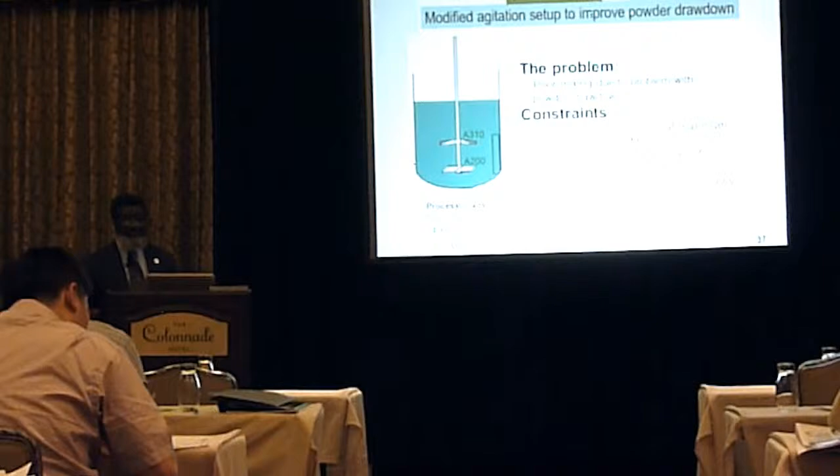So in closing, let me just talk about three cases, three applications. The first one here is a troubleshooting problem.

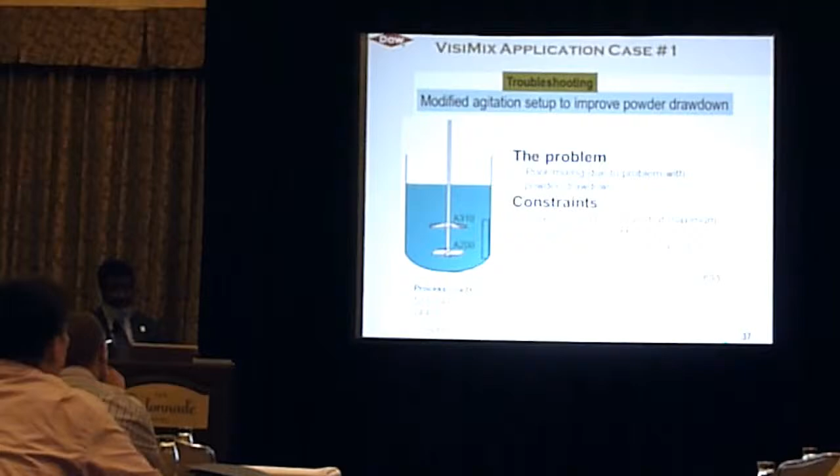The problem was poor mixing due to a problem with powder drawdown. You had a configuration in the plant, and they were having problems drawing down the powder. Part of it was the fact that the particles were very light, so they don't sink, but also part of it was the fact that it doesn't work very well. So you need to find a way to draw it down, and in this case you want to create a sort of little vortex in the center to draw it down.

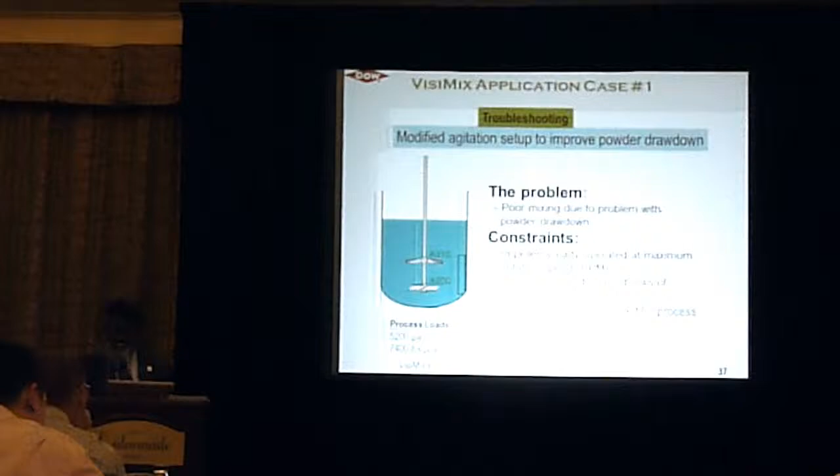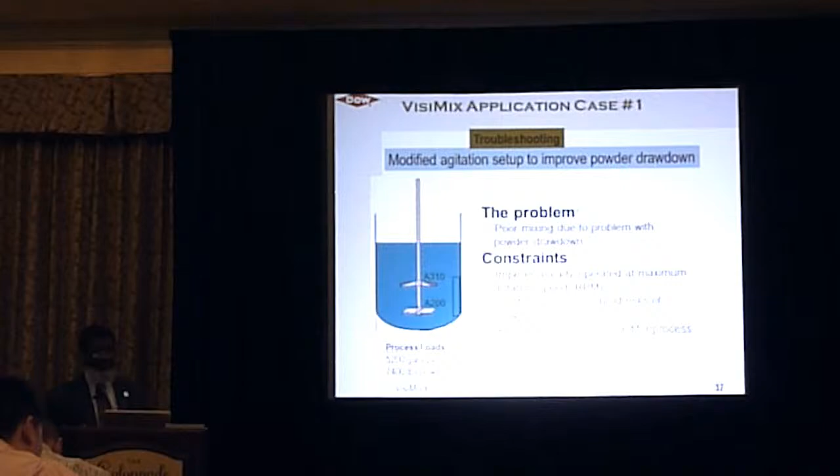We looked at this in a 5,000 gallon process. You're adding about 7,400 pounds of powder - not all at once, but adding over time. Some of the constraints were that the impellers already operate at maximum rotational speed for the shaft design, so you cannot increase the speed. So what are some other things you can look at?

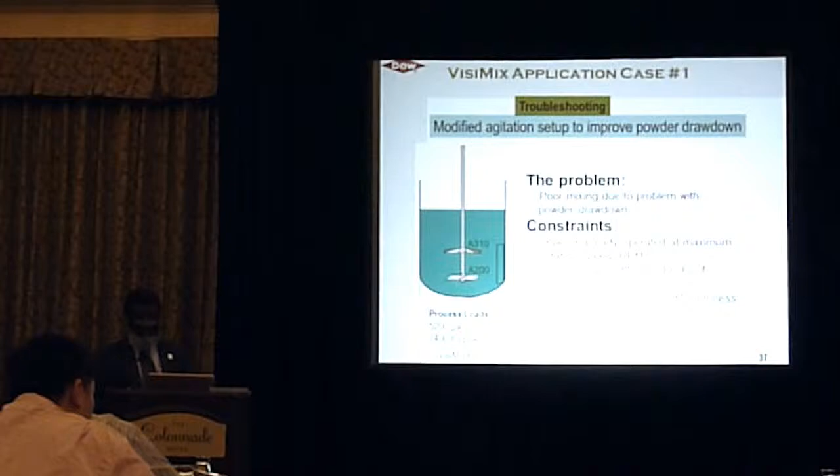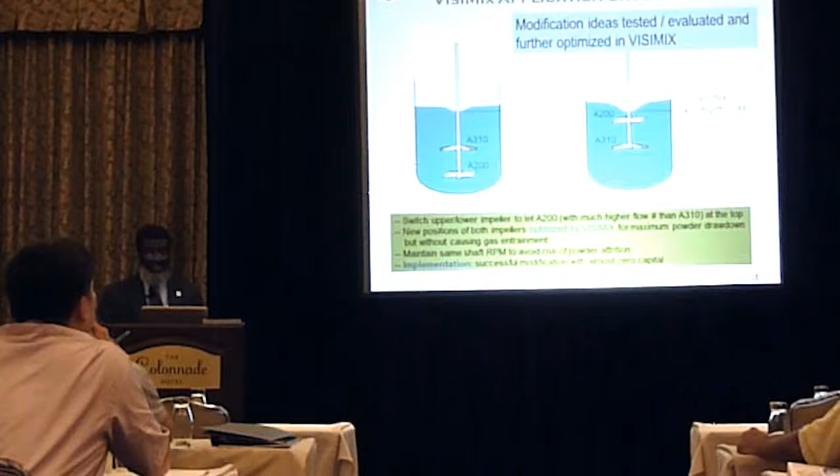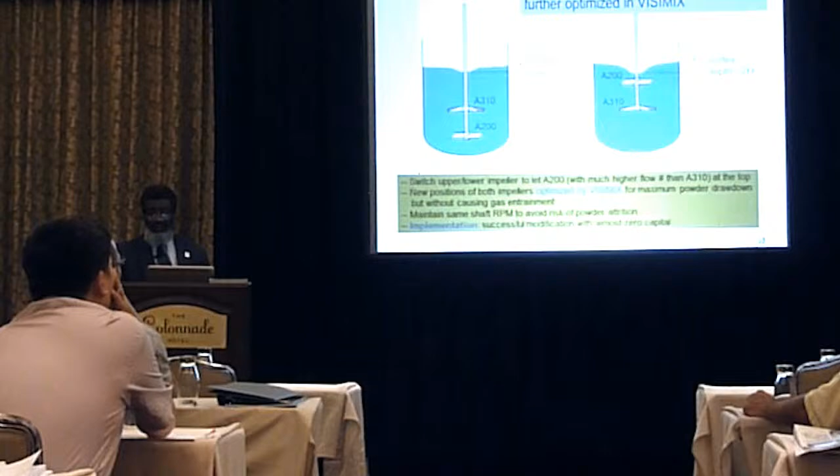Also, air entrainment is undesired for this process. Some of the things we looked at: on the left is the previous setup, where they had a pitch blade and a hydrofoil on top and the location of it. On the right, we looked at a number of cases - a colleague looked at a number of cases and decided on the case shown on the right there.

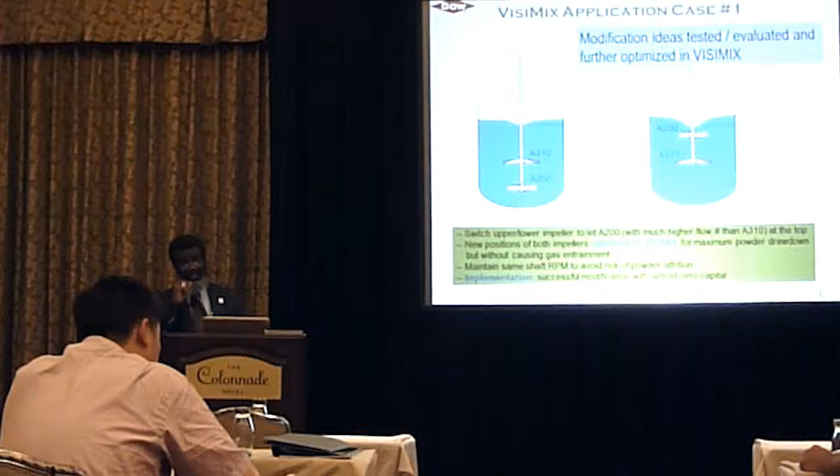This was implemented successfully in the plant. This doesn't take a whole lot of time to do because, as I said, because of the accessibility of the tool and so on, you can do these things very quickly. In this case, we were relying on creating a vortex, but a vortex in such a way that it doesn't suck in a lot of the headspace gases and create a lot of bubbles in it.

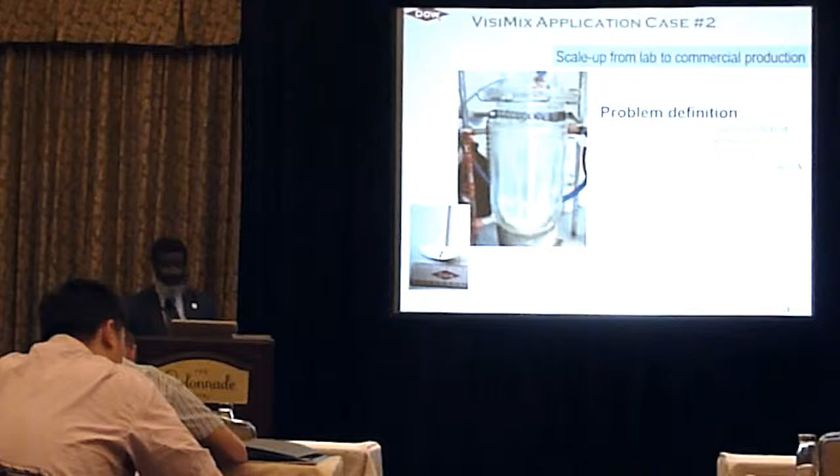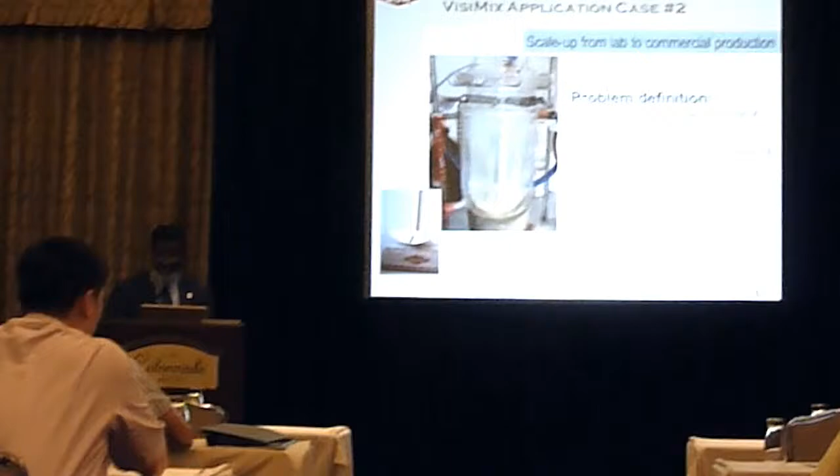And this was tested, and it worked very well for the plant. Here's a case where we're doing a scale up from a lab to commercial. We're going from 700 cc's to a scale up of about 10,000.

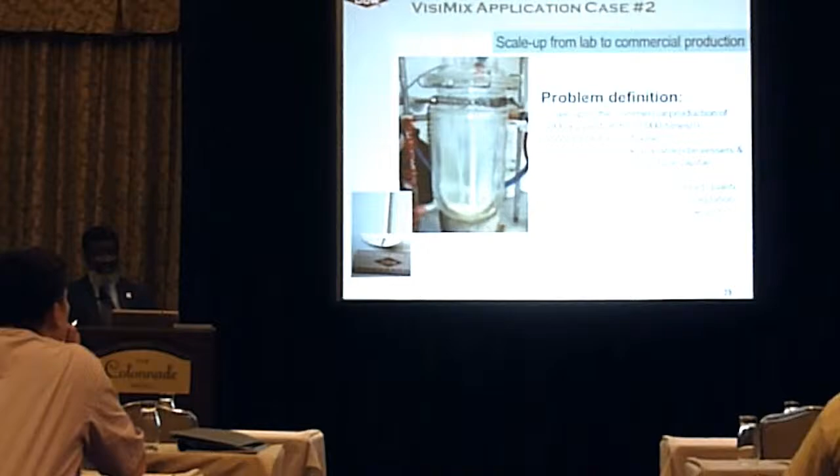Here's a case where the work basically was done - you did the lab work with the 700 cc's, and you want to be able to convince somebody in the plant that the proposal you're making, scaling up 10,000 times, is going to work.

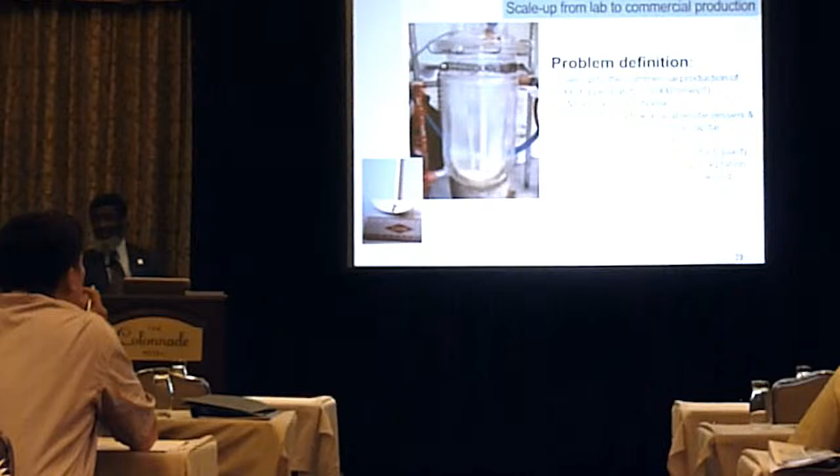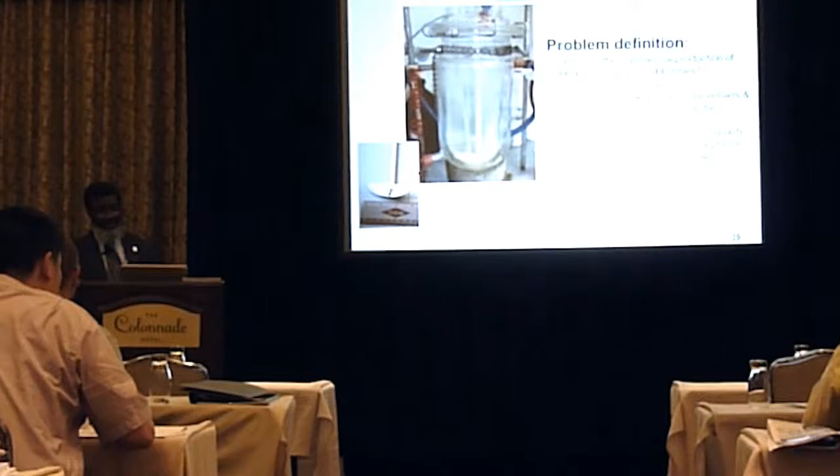So what reactor to choose? They had a number of available idle vessels that they had to look at in the agitation systems because they want to reduce capital. This kind of thing happens all the time in facilities and plants where you want to reuse equipment that you already have. So how do you scale up the agitation?

Lab tests show that the product quality was very sensitive to mixing or agitation. Too much or too little agitation will negatively affect the product. Now, we can't tell you what the product was and all the details, but at least we can share this part and what was the mixing time involved.

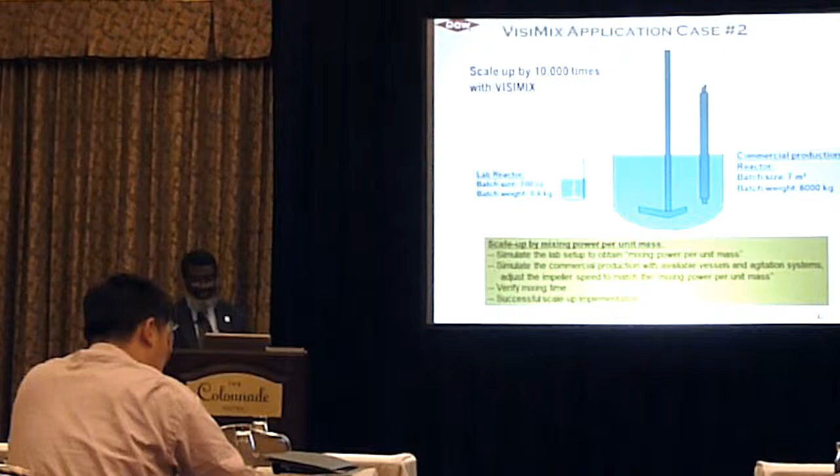So again, we used VisiMix, and this was the case that was selected. Again, this was successfully implemented. Because of the accessibility of this tool, you can do this kind of assessment relatively easily.

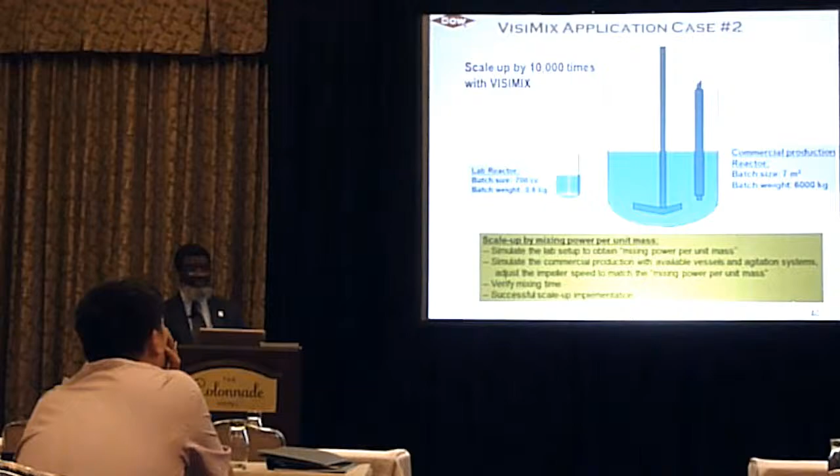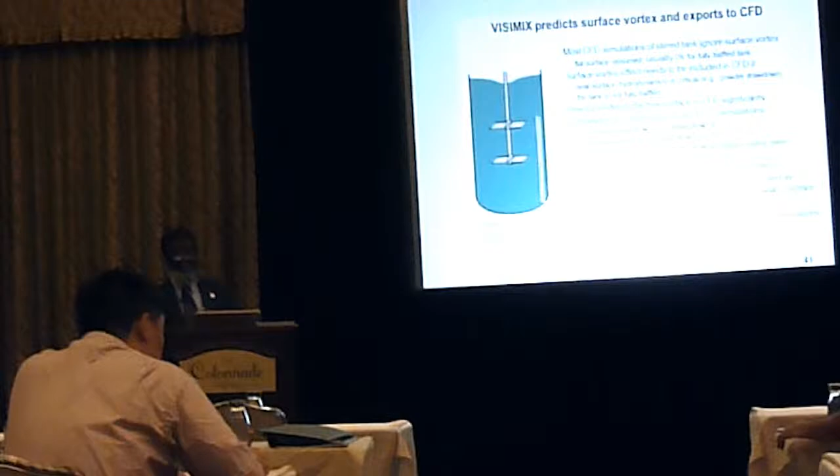Okay, case 3 was a case where we were doing some computational fluid dynamics. In most CFD calculations, you assume the liquid surface is flat, which we know is not true. The assumption is that the flat surface does not affect the hydrodynamics. But if you carry out processes where you need a vortex to entrain liquid, entrain powders or something like that, then you cannot assume it's a flat surface, okay?

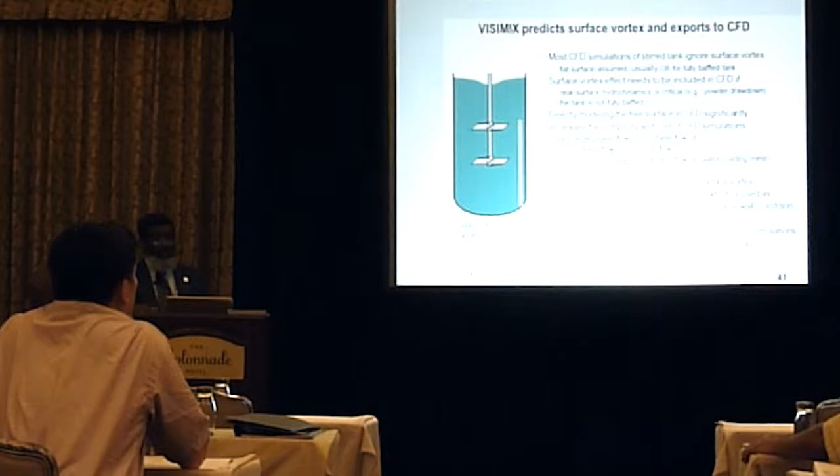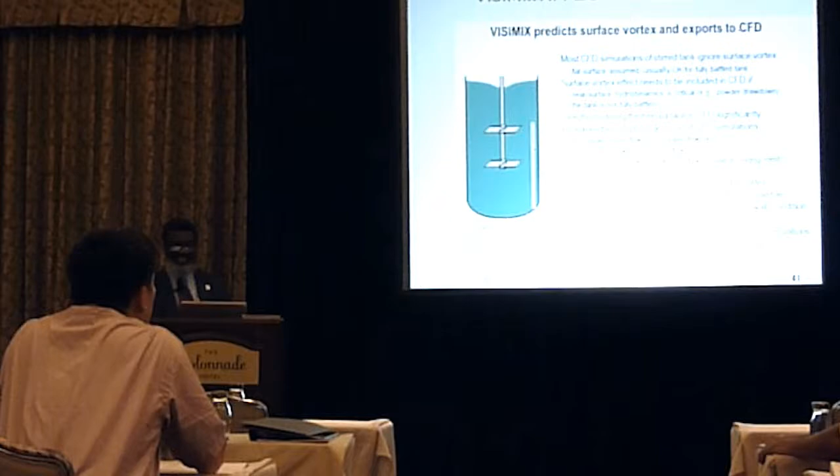Now, to model a surface like this in CFD, you have to use the volume of fluid, and it's not a simple calculation. So if you can find a way to get the shape of the vortex and then patch it into your CFD, it simplifies things. This is exactly what we did. I showed you earlier that VisiMix is very capable of predicting the vortex in these stirred vessels, so that's what was done. VisiMix was used to estimate the vortex, and then that was patched into the CFD, and the CFD was carried out.

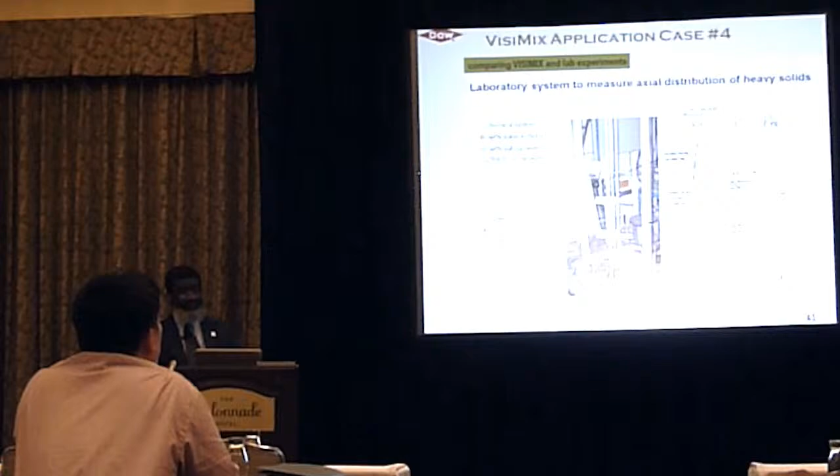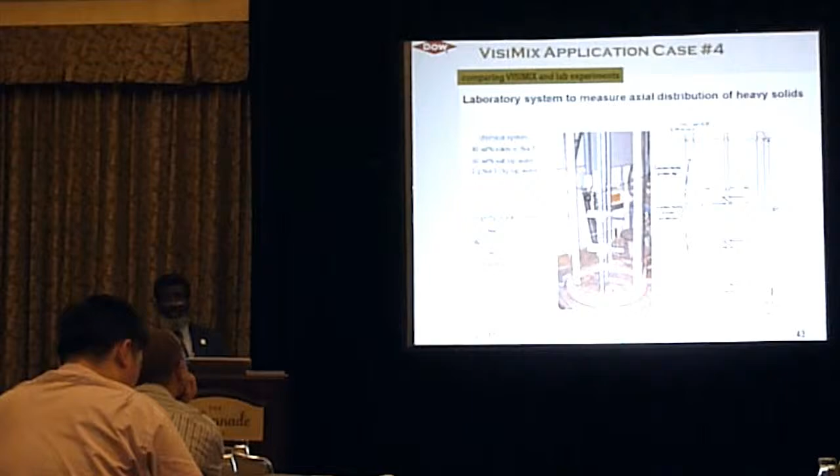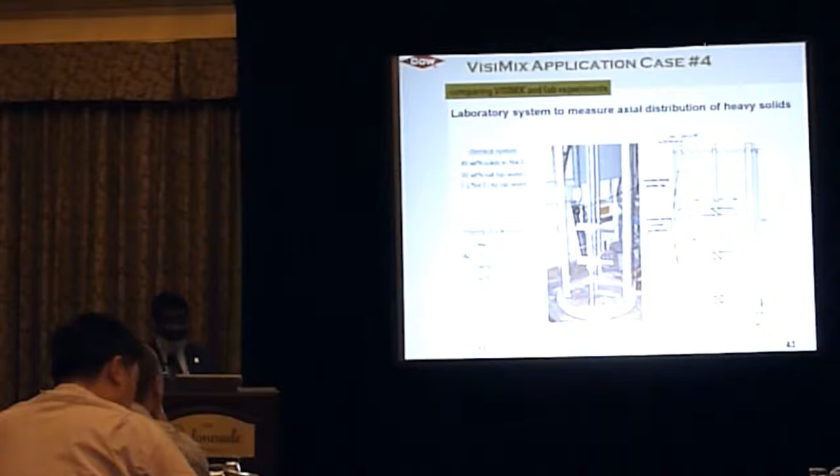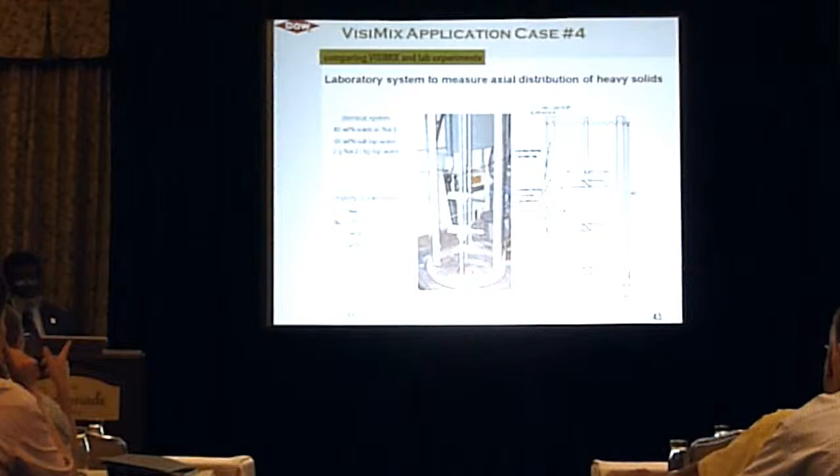The last case I'm going to present is one where we were looking at solid suspension and distribution of heavy solids, very fast liquid-solids. The challenge was, are we able to predict the distribution of solids, particularly near the surface, because material was going to be withdrawn from the surface, and was it going to be representative of what's in the vessel? So here was a tall tank with 3 pitch blade turbines running. Again, we know all the properties, the geometry and so on, so you could simulate this very well in VisiMix. In this case, we actually did experiments with this particular setup, and we compared the results with VisiMix.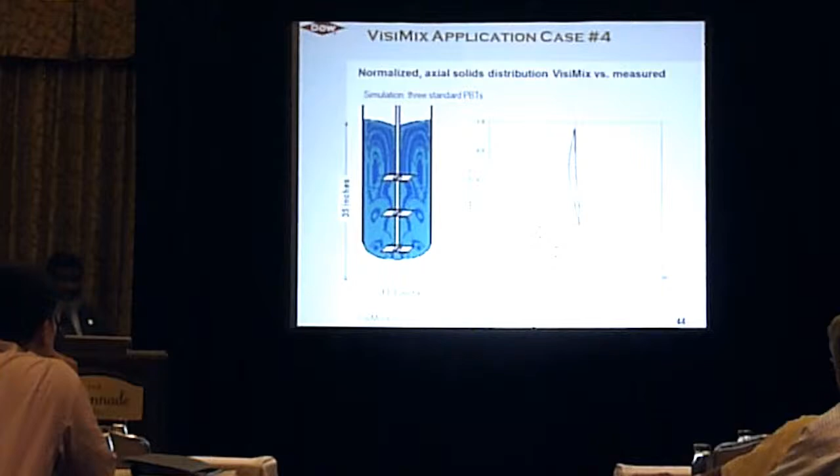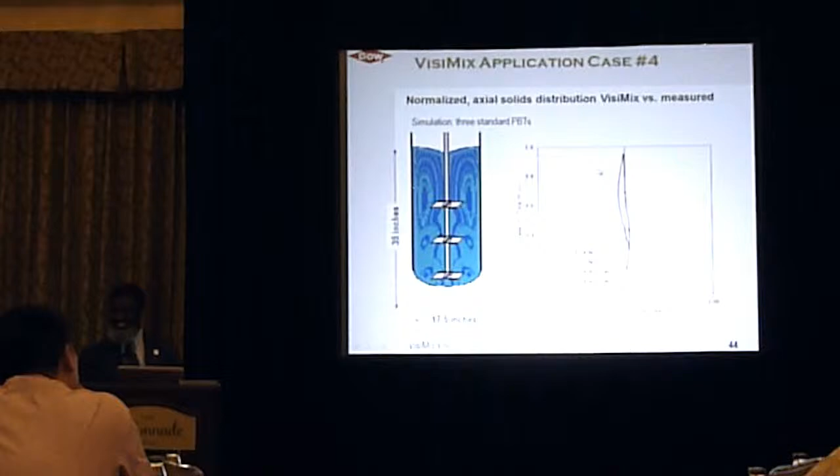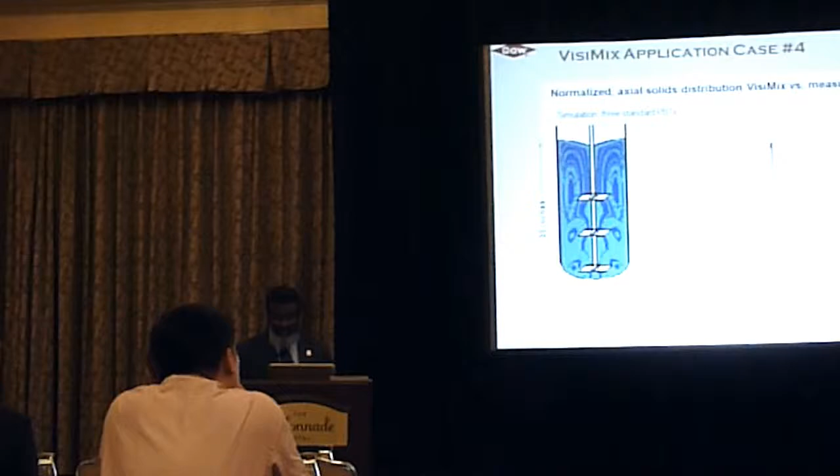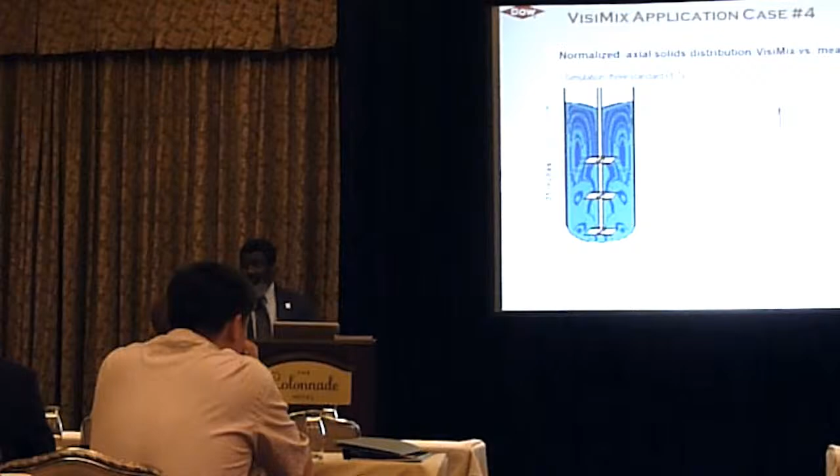Now, you see here very clearly, typically when you do these kinds of measurements, what you find for a shape like this is called a belly plot - people with what you call beer bellies, so it's a belly plot. Now the result for VisiMix, it's okay, not very clear, but this green line - do you see that there? Yeah, you see that, okay. So VisiMix is not able to actually show this belly plot, particularly predicting the distribution of solids near the surface. VisiMix has a lot of difficulty capturing that kind of information. But much below the top liquid surface, it does a pretty good job. Actually, I think it overestimates the uniformity of the solids in the liquid.

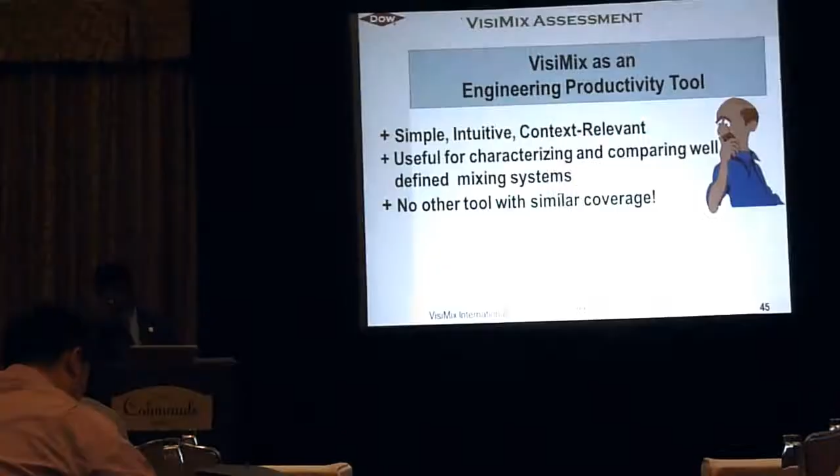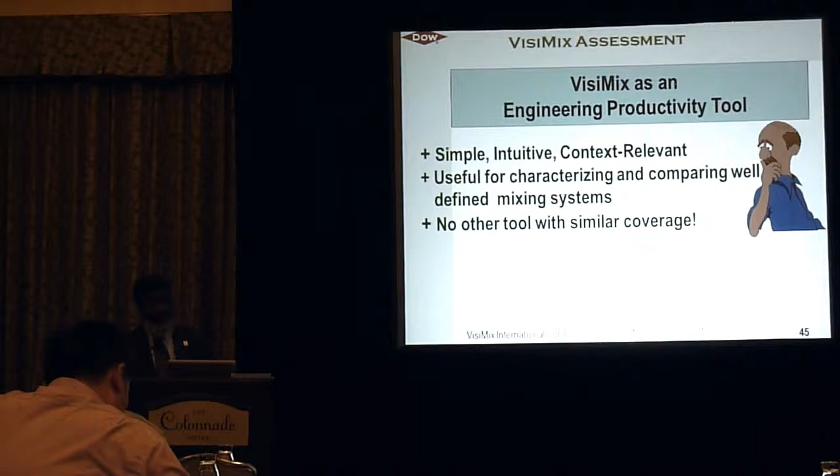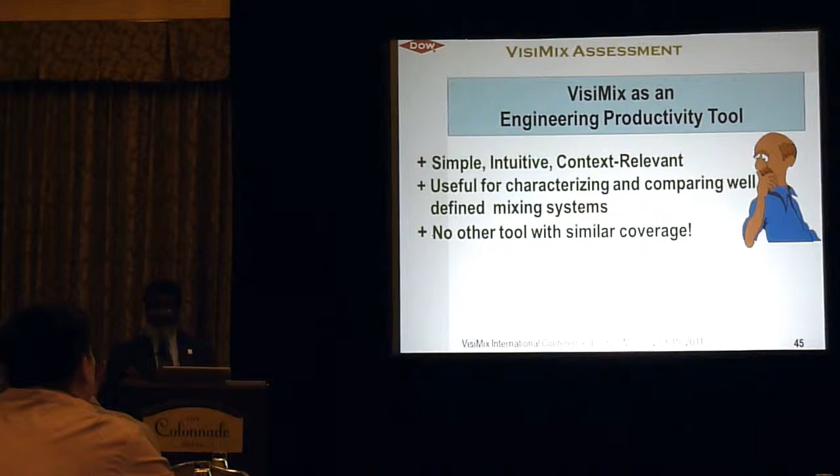So, basically what I've tried to show you here is that VisiMix is really an engineering productivity tool. It's simple, intuitive, and context relevant. It's very useful for characterizing and comparing well-defined mixing systems. As far as we know, there is no other tool with similar coverage and capability out there. There are a lot of tools out there, by the way - lots and lots of tools, some based on spreadsheets, some based on other models and so on. But in our search, we haven't found anything that comes very close.

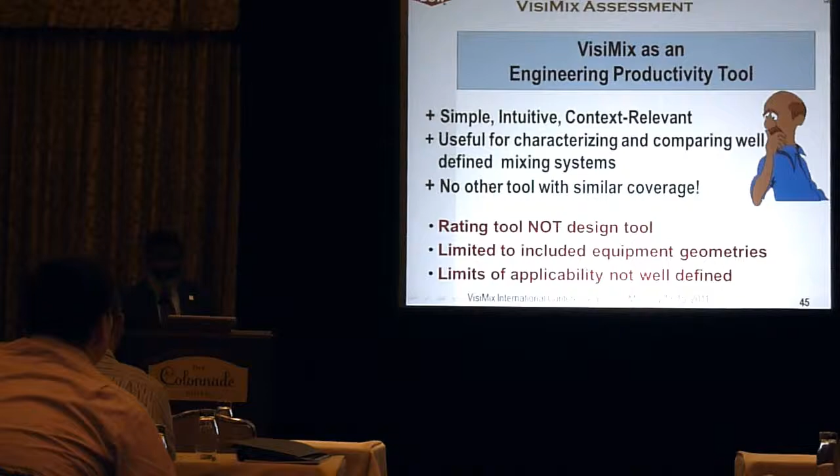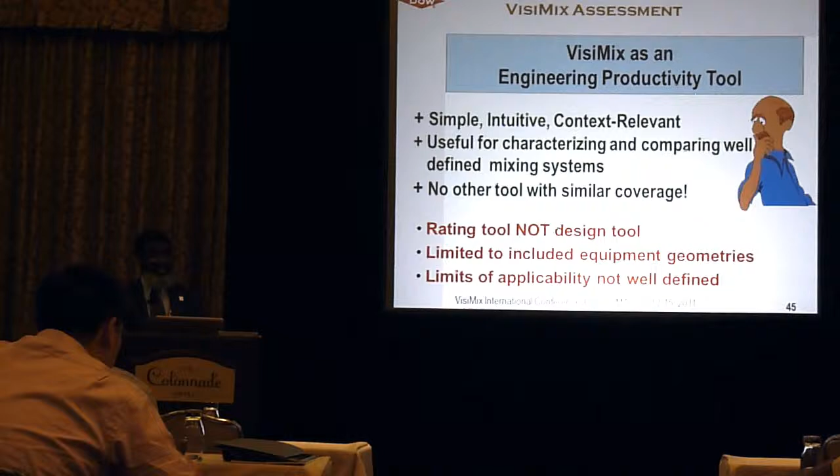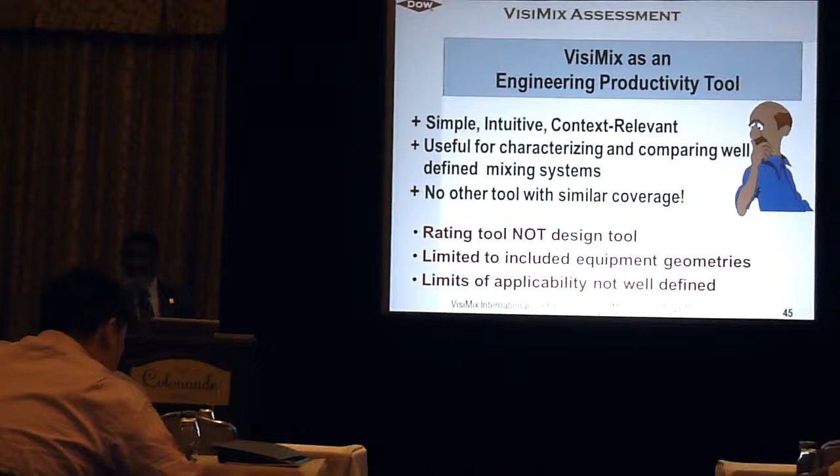But it's important to stress that even with this capability, VisiMix is a rating tool - it's not a design tool. You can use a rating tool if you do parametric studies to cover the range of possibilities, and then the ultimate decision is an engineering decision that you, the user of the tool, will have to make. So you cannot come to this tool with zero knowledge about mixing processes. It's very important that this be emphasized.

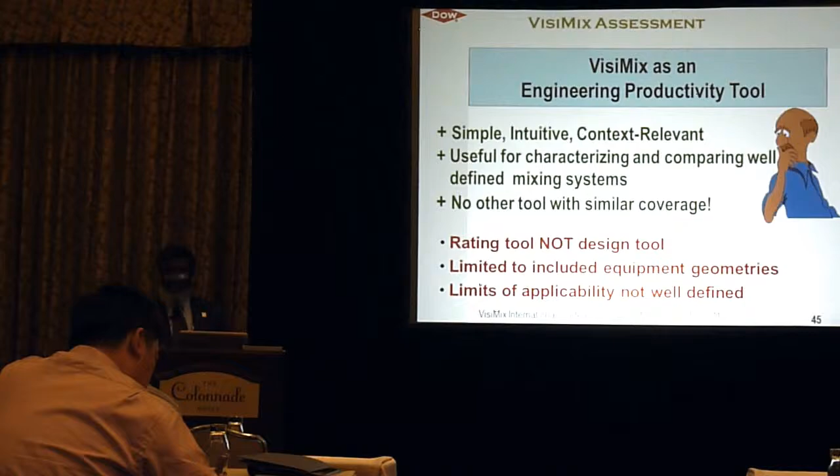Now, it's limited - you cannot encode your own geometries and so on into the tool. The interface is simple, intuitive, and context-relevant, so you can interact with this. Any chemist, any chemical engineer, without knowing anything about mixing, can supply this information. In a way, that is part of the rub, or the challenge, of using a tool like this. You can give it to anybody, even a high school student - if you have the information, you can put that in, right?

Now, the last bullet I have here - first of all, you can use different units, SI units or US customary units. The calculations themselves don't take very long, so you can interact with this tool and get your calculations very, very quickly.

But the rub here is, as you saw in the slides I showed you, it doesn't say anything about what is the process result - that's not an input in this tool. So you cannot come to this tool with zero knowledge about mixing and also about the process you're dealing with, and that's a challenge, okay? Because you can come in here if you have the equipment and process information, put it in, hit a button, and get a result. Then the question is, what do you do with this information? Is it useful? Is it helpful? So that's a challenge with the tool.